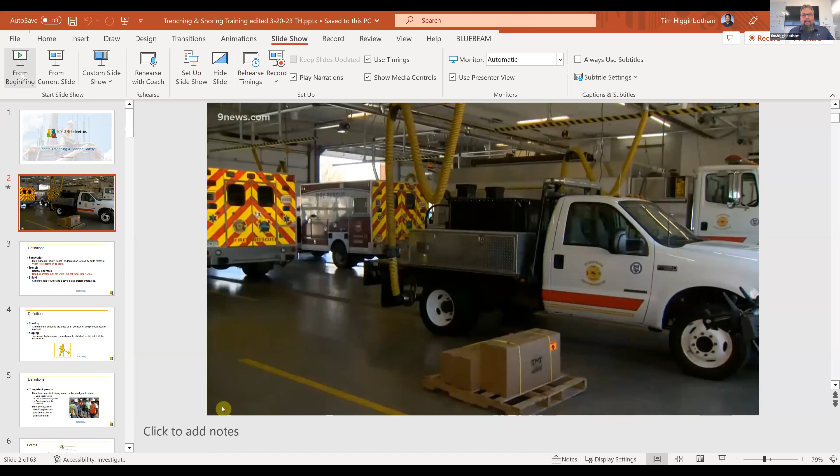Yep, sure can. Awesome. So I'm doing this right. All right, good job, Tim. Yeah, thanks — I'm going to tell you, I took a college education just to get this piece of it.

Well, good morning, guys. Again, I'm Tim Higginbotham. This is Encore Trenching and Shoring safety we put together for you guys. So we appreciate you guys letting us be a part of it.

Why are not my slides moving? What's going on here? This is real quick, guys — I'm going to start out with a video.

Remember when we were talking about that trench over in Windsor? I wanted to start out with this — this was a news article from 9 News that came about, and it's a pretty heartwarming video. I kind of want to talk about that and why this video came into play. This is a once-in-a-career type incident.

The call that cleared the garage on Tuesday — it was empty, yeah — sent everyone, including Chief Kris Kazian, was a long day, to a home construction site on Camberley Drive.

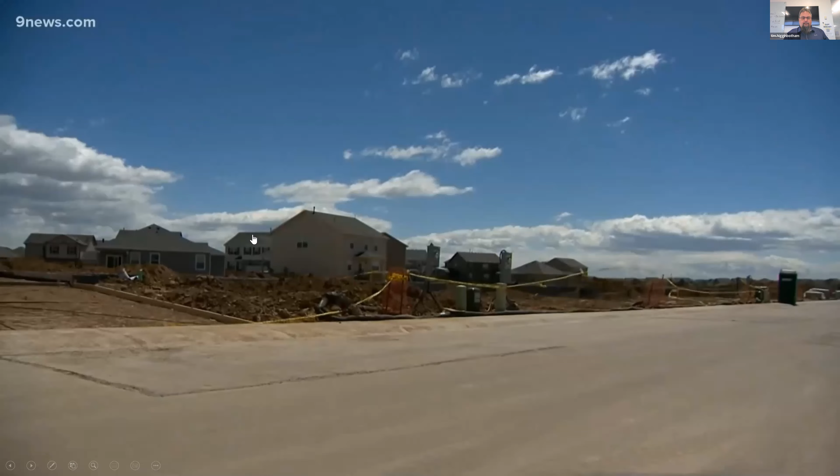All that dirt is all dirt that caved in. Two workers in a trench were buried in about 8 tons of dirt. Very heavy, very compacted when it all collapsed.

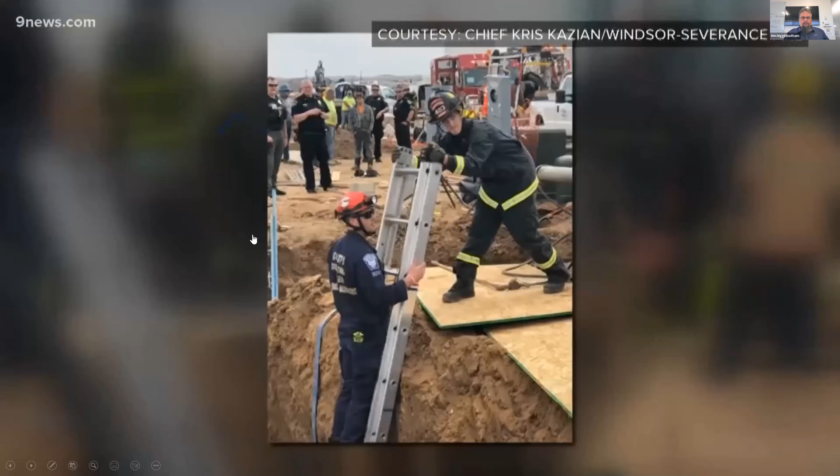Fire crews don't think anything was used to shore up the trench walls. On arrival, we did not see a trench box in place. They used heavy equipment and eventually shovels to dig. Every time we got a bucket or two of dirt out, more dirt would fall in on them.

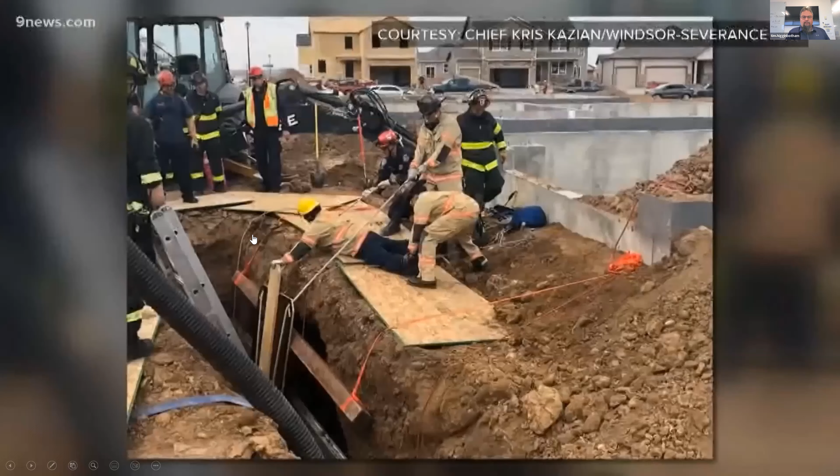They knew at least one worker was still alive. For whatever reason, in this case, he was able to breathe for hours, able to talk too, first through a PVC pipe and then through a microphone to family gathered at the scene. Our crews felt that it was important for this family and for him to have an opportunity to speak - a chance to say goodbye.

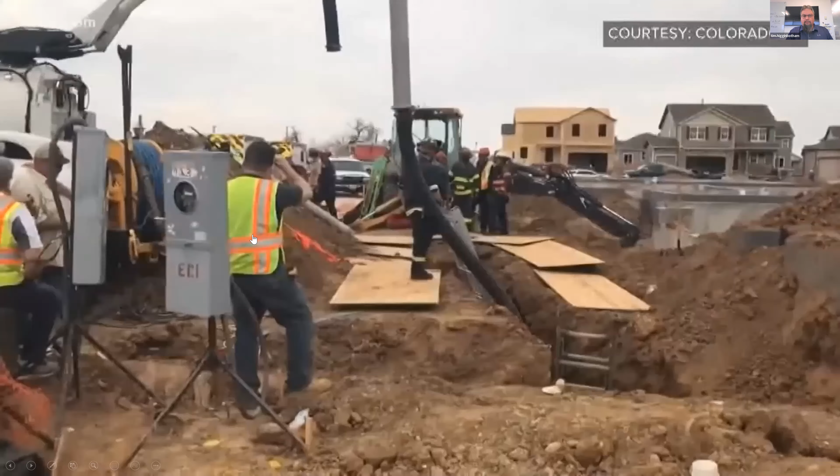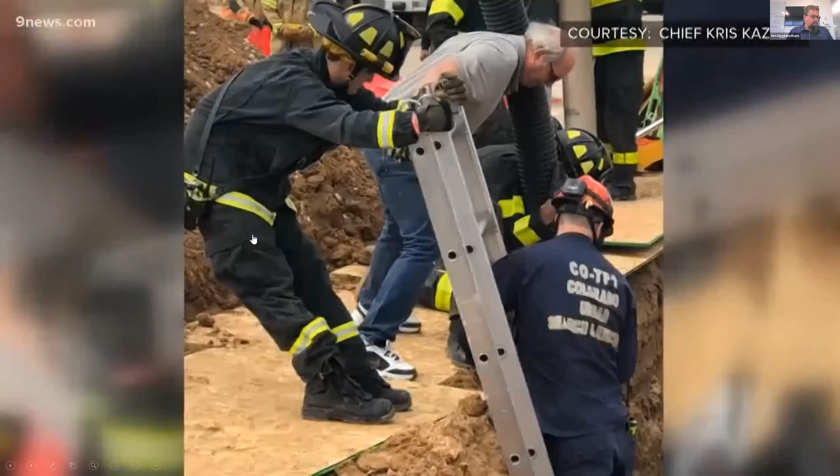As responders, we were concerned that we might have a poor outcome, but we wanted to make sure that he and they got a chance to communicate. It'd be nearly 12 hours before crews pulled the men's bodies from the dirt. So it's very challenging for all of the responders, mentally and physically. The kind of call no chief wants to repeat.

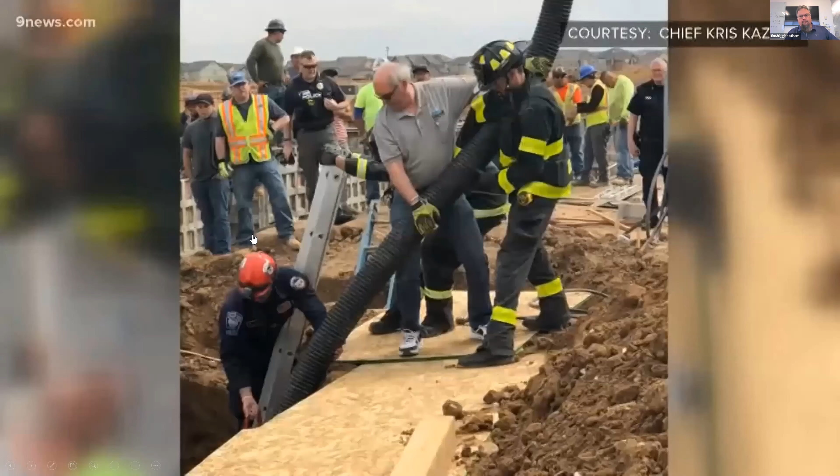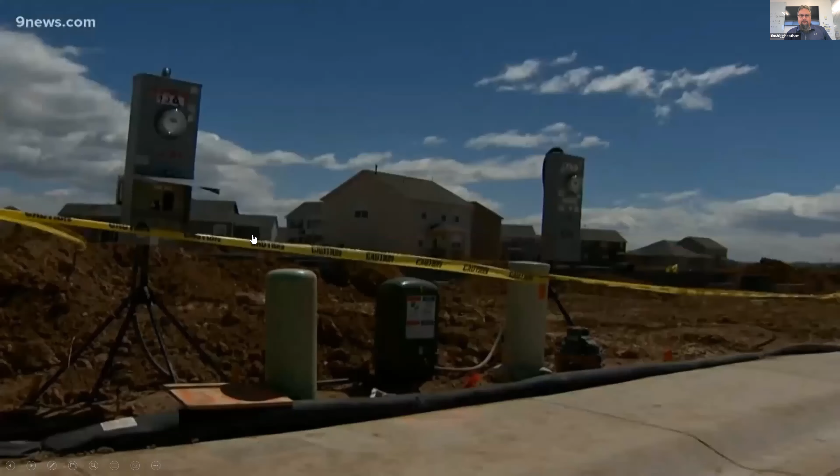Our thoughts are with the families. It's definitely a tough time, and they're not the outcome that we were looking for, and we worked very hard to have a different outcome. In Windsor, Noel Brennan, 9 News.

Yeah, like I said, that's a real video. That happened here, guys. I'm sorry, but I still get the chills when that guy says, to say goodbye. It almost brings me to tears, to be flat out honest with you, because I couldn't imagine talking through a pipe or talking through a microphone, can't see them, all you're doing is just saying goodbye and I love you. So when it comes to that, guys, first thing we're going to start off with here is understanding what an excavation is, what a trench is, because it's important to understand.

I mean, we've seen it on the job sites, we got to dig them out, we got to get basements in. A trench is a narrow excavation, so its depth is greater than its width, which can't exceed more than 15 feet.

A shield is like a structure that can withstand a cave-in to protect people inside that trench. And shoring is more of a structure that supports the side. So when you're talking about a shield, that's something that we use probably more than anything - that's the trench box that you guys are going to dump into the trench.

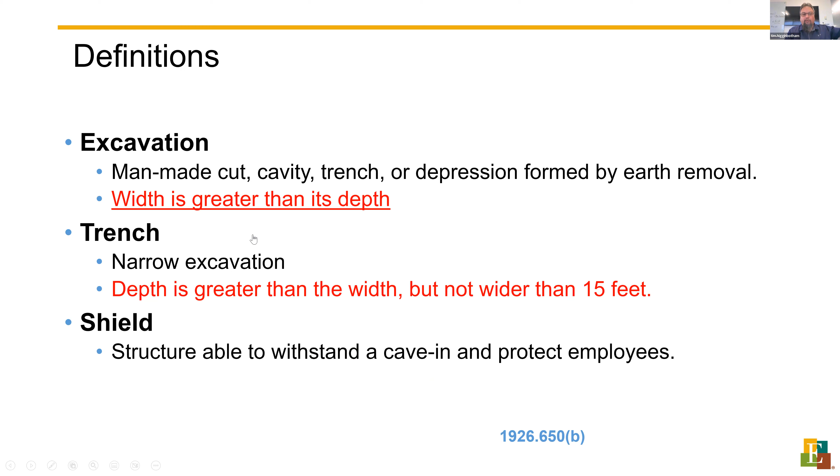That's what we're really going to talk about today. We're really not going to talk about shoring a whole lot, because now you're dealing with timber structures, aluminum shoring, things that you got to figure out how to get built and get inside the trench - normally it's built inside the trench. We won't do anything like that. These are things that are going to be up for long periods of time.

Slopings are techniques to give inclines an angle to where they don't cave in, they don't slide. It gives those guys an opportunity to work inside of a trench. And the thing about sloping, guys, when you got let's say a 10-foot wide trench, and then you have to trench - we'll talk about ratios, but like a class C - you got to open that up wide. If you're 10 foot in the middle of the trench, you're going to be 10 foot on each side of that trench. You just now opened up a 30-foot wide trench.

So a lot of times when we talk about sloping, sometimes you just can't do that on a job site. You don't have 30 feet, especially when you go downtown Denver - you're just not going to get 30 feet. I mean, they use all the real estate that they can.

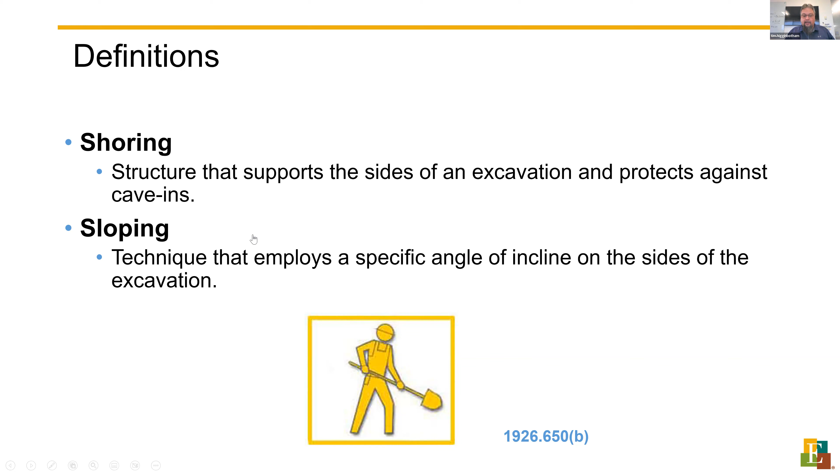Competent person - someone you got to have on site when you're trenching - and training is important. If you don't have a competent person, then you get caught. It could be criminal charges if someone dies inside that trench. I heard that just this morning, and Joe was telling us that those guys got charged - that company got charged, cited for that trench, for those 2 guys dying inside that.

A competent person must have specific training and knowledge about soil classification and the use of protective systems required by the standard, and must be capable of identifying and eliminating hazards inside that trench. When it's raining, snowing, any kind of weather, the dirt can change and you can have different classifications — a class B on top of a class C, or vice versa. You've got to open those up according to each classification. It's really tough when you have a C on the bottom of a B, which is very rare, because everything gets so compacted the deeper it goes.

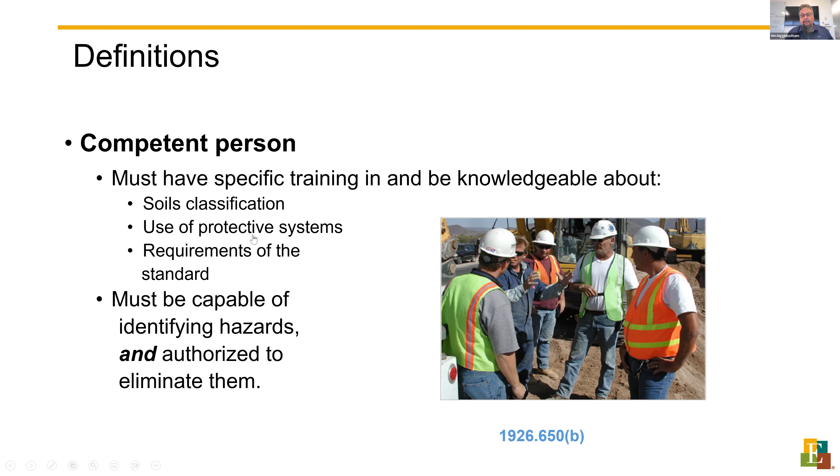This is what we use — we actually use a permitting process. What this does is it gets guys involved. It asks them what they've done, if they've looked at it, how they've looked at it, what soil classification, how they got that classification, and that they've called 811 and gotten their locates, including our subcontractors. This also includes that if we have a subcontractor on site, they have to get their own ticket number for 811 — they can't piggyback on ours.

Every 30 days, it shows on number 3 a 30-day 811 ticket number, so it automatically reminds them they have to do this every 30 days. Be flat out honest with you guys, that's what this permit process is for — to get these guys to think. When they come up with their soil types, it shows what it is — type C, 1.5 to 1; 1 to 1 for type B; 3/4 to 1 for type A. It gives them a good idea, because the guys have already been trained. A lot of times all they need is something to bring back to their memory on what they need to do.

It also gets their project manager involved — it requires the project manager's signature. Anytime you guys can get a permit process going when it comes to trenching, it's great, because it makes them stop for a minute, and that's what we want them to do. Sometimes we go, hey man, let's push, let's get it going, but the best thing I can tell everybody is get these guys to stop and think, make sure they've covered everything, because there's lives at stake, and we're all held accountable for them, especially the competent person on site. Be honest with you, him and the company are held liable for that. So this is our permitting process.

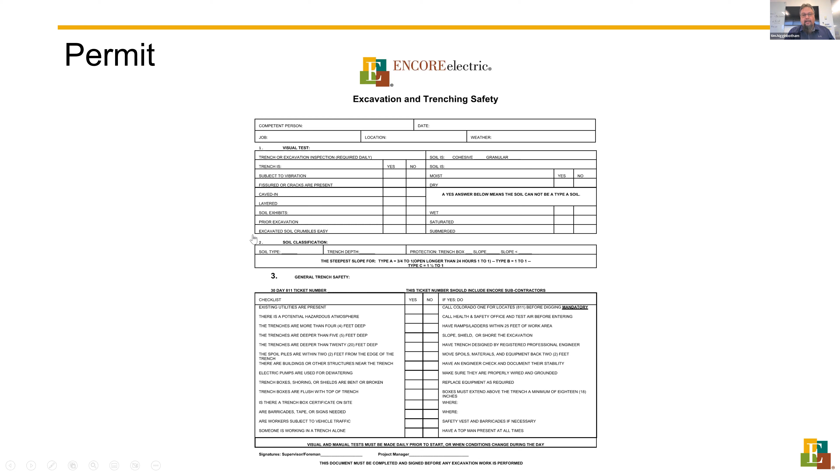When it comes to the weight of soil, 1 cubic foot of soil weighs 110 to 140 pounds, guys — that's a lot, and that's just 1 foot. Imagine a 1 foot by 1 foot square box — 110 to 140 pounds. Now think of a backhoe bucket, about 3 cubic yards. 1 cubic yard of soil can weigh 2,100 pounds. So now you're looking at a backhoe that can hold 2,000, 4,000, 6,000 pounds of dirt.

One thing you want to do is communicate with those operators before they dump that in. Years ago, about 20 years ago, we lost a gentleman with an electrical contractor — he died inside a 2-foot trench. He told the excavator operator he was done, but then went back to grab some tools and put a pipe back together that he'd forgotten about, and the operator dumped a whole load of dirt on him. Killed him instantly. His wife called and couldn't find him — he didn't come home that day. They dug him up the next day. So really communicate with them — if you're going back inside that trench, you've got to let your operator know, so he doesn't drop any more dirt, because the minute you tell him you're done, he's going to continue to do what he needs to do. Communication is important.

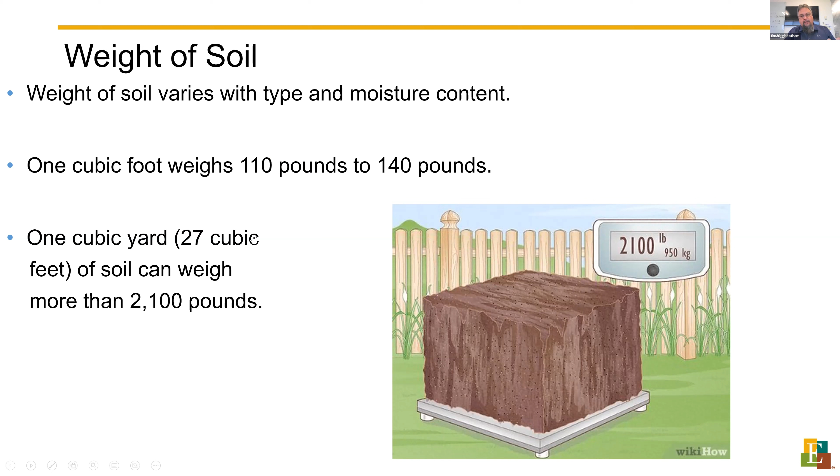When it comes to that weight, when we store all that dirt on the side, I just want everybody to know — let's say we've got an 8-foot, 10-foot deep trench open, and it's 5 foot wide. You put all this dirt on there, and it starts to crack. It starts to make these fissures inside the dirt.

Remember, you put 6,000 pounds of dirt there, and there's a cavity. There's so much weight on that dirt it can cause it to collapse inside your trench. So you want to push that spoil pile back at a minimum of 2 feet. If you're going to have big piles like that, I'd recommend putting them somewhere else and then picking them up and dumping them back in the dirt.

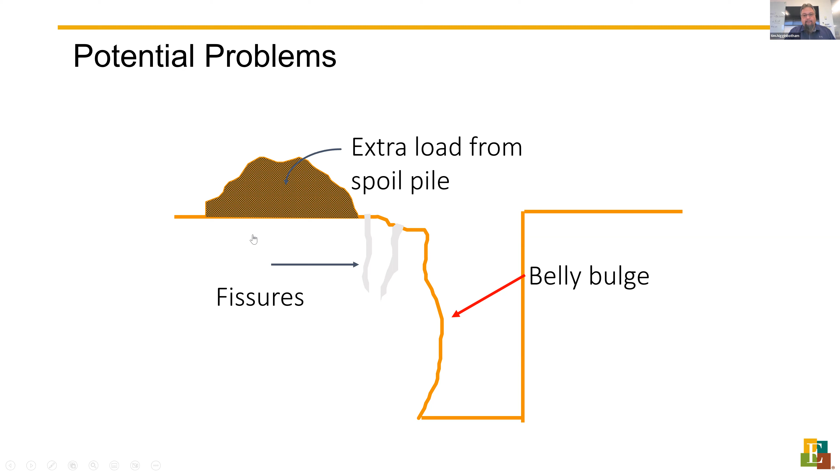Honestly, anytime we can't get inside the trench, we'll dig it, build the pipe on the ground, and kick it literally inside the trench. Anytime we can stay out of it, we will. The only time we really get inside of it is when we're building duct banks.

But cave-ins, when you look at this, are your greatest risk. Other things to think about inside these trenches, if you don't know your dirt, are toxic fumes, if there's any kind of gases in there.

Like Rocky Flats, if we're doing work out there — that used to be some kind of chemical storage facility with our military. Now they're building houses on it. But one thing about it, guys, is it's good to test the dirt in those areas so you know what's inside of it.

Machinery near excavations can cause a collapse. Machinery likes to vibrate a lot, so you really want to watch machinery when you're out near excavations, roadways and traffic areas, underground utility lines, and any kind of falls over 6 foot.

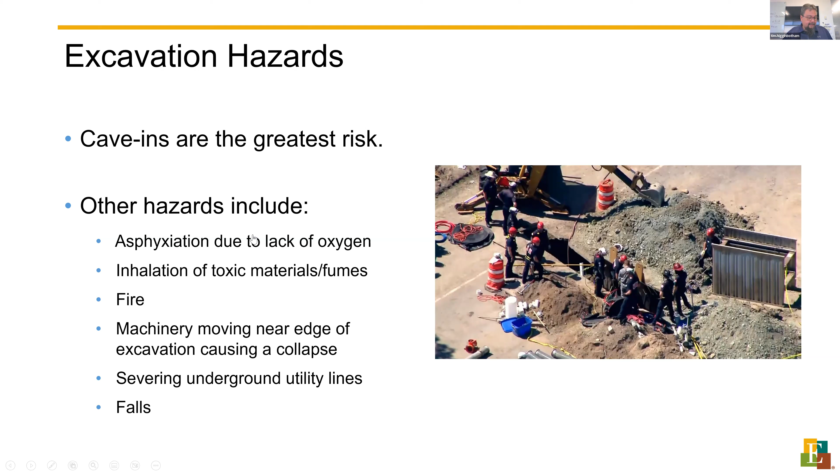Let's talk about those utility lines. They seem to be happening quite a bit here lately — you guys watch the news or hear things about it. Utility lines are important, you must call 811. What they do is look for your sewer, telephone, gas lines, electric lines, water lines, and these are the colors they go with: red is electric, yellow is gas, and blue is water.

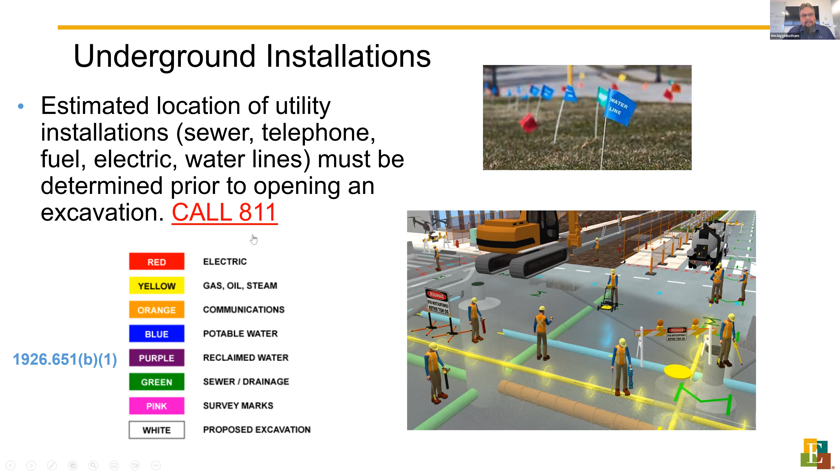When you dig these lines, you can't dig on top of them, because if you break them you can get charged that cost to fix them. It's expensive — if you break them too many times, Xcel Energy will actually fine you in the tens of thousands of dollars because you keep hitting their lines. I've seen that happen. So it's required by the standard, call 811. This is why we like to put it on the permit process, because it gives us that number too.

When you're looking at those numbers, this is what it looks like. They put it in a straight line, and you hand dig or pothole over those lines, minimum of 3 feet on each side. If you're using a trencher, you cannot trench within 3 feet of that line. I've seen those lines off time and time again, and they can be at least 3 to 5 feet off, so I'd recommend hand digging every 5 feet.

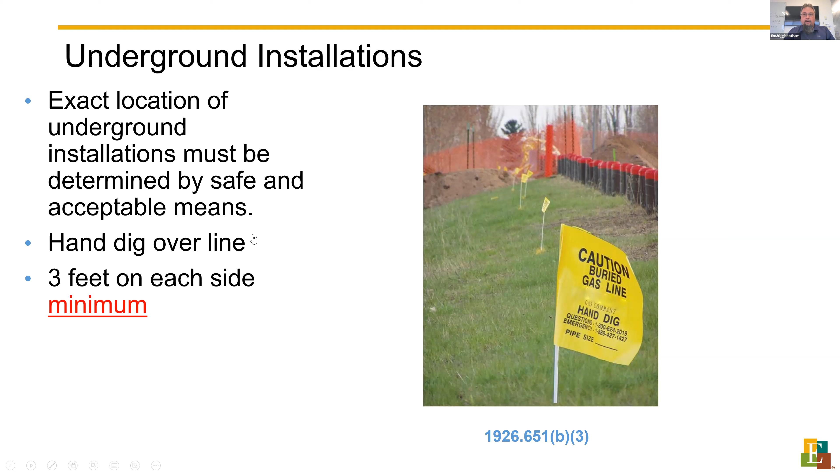You're going to have 10 foot of trench there, and you're going to have to hand dig or pothole. But believe me, guys, it's better than hitting an electrical line, especially a 13,200 volt line — it can create quite an arc blast if it doesn't kill you.

Stairways and ramps, egress inside these trenches, are important, especially if they're deeper than 4 foot in depth. 4 foot's your number, so you have to have a box or something inside that trench at 4 foot. Technically it's 5, but our program is 4 — I'm going to go with 4 for us today, because here's the thing: 5 foot is so close, guys.

5 foot's so close, guys. And when OSHA comes out and puts his tape measure inside that trench — Jack King can probably say yes to this — he's going to find the deepest piece of that trench, and if you're 5'1", 5'2", you just violated that trench. So we put a 4 foot in place. Lateral distance of travel can't be more than 25 feet.

So you got to have a ladder in there, ready for access and egress. Okay, and one is fine. You look at this picture and he's got his trench box there.

There's something wrong here. When you look at that trench box, he needs to be at least 18 inches above that ground, with the ladder there. That way things can't fall inside that trench box. It's almost like a guard to protect material from going inside of it. So remember, trench box, 18 inches above the ground.

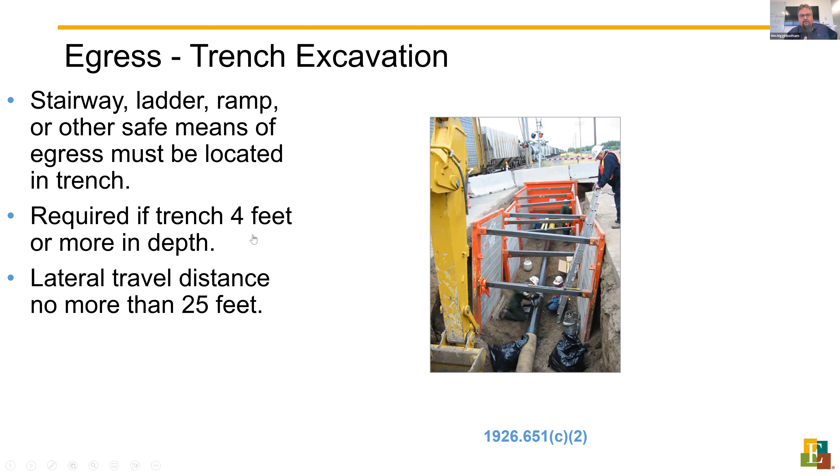25 feet of lateral distance when it comes to egress, required if a trench is 4 foot in depth or more. Here's your travel.

Let's say you dug a 50-foot trench, and this is a great way to do it, guys, because you can literally see how he's got 2 ladders on each side. See how that guy's right there in the center? You could drop a ladder right there in the center of that 50-foot trench, and have ladder access 25 foot of lateral distance either way you go. If the trench is larger than 50 feet, now you got to have one every 25 feet.

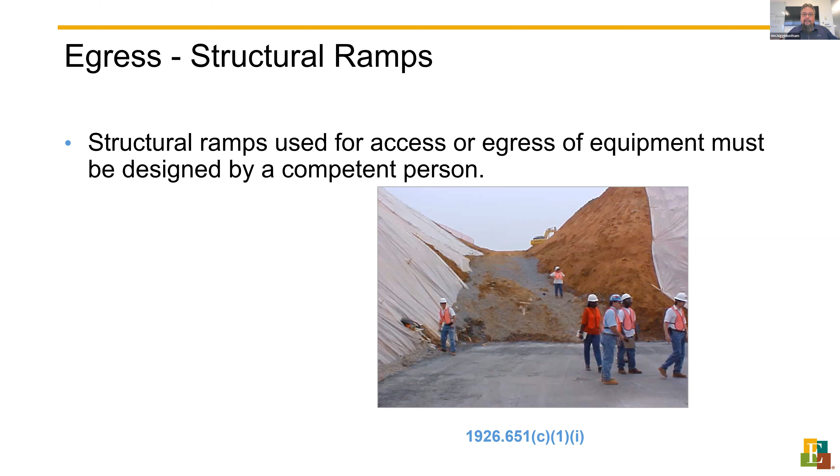Now, you can't do this for a trench on one side of the trench. Let's talk about that trench for a minute. I'm going to go back up here. See on this right here, let's say he's got a 50-foot trench here. And if you have vertical walls on each side of that trench, you have to protect that vertical wall.

I tell my guys, if all you're going to do is have a 5-foot trench, slope each side of the trench. Now you don't have that vertical wall, and you have access and egress in and out of the trench. You can use that for 25 feet inside. Then you can put your ladders in if you have a longer than a 50-foot trench.

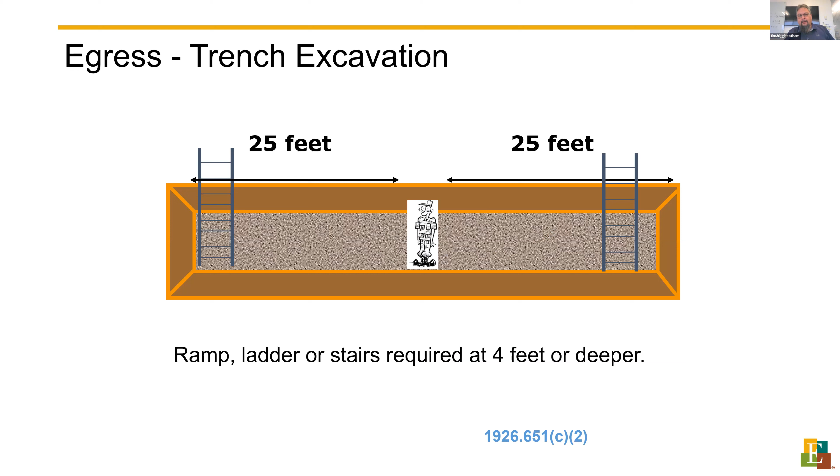So don't forget about those sides. It tends to be forgotten about a lot.

Another thing is exposure to vehicular traffic. We do a lot of work on the roadways, a lot of trenching on the sides of the roads. So you got to have some kind of barriers up, either guiding traffic or you got some kind of Jersey barrier to protect you from vehicular traffic. You also have to have a trench box because all the vibration from the traffic can cause these trenches to collapse. So never get into a trench. Honestly, even a 3-foot trench can collapse on you when you're on your knees.

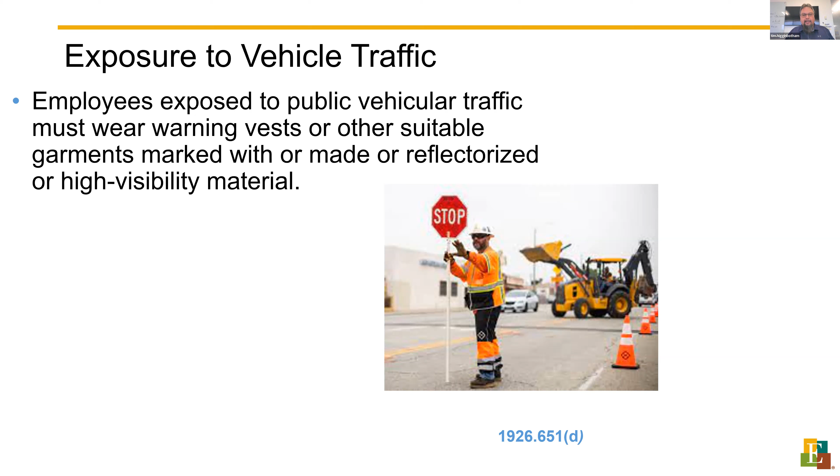So really watch your vehicular traffic. Sometimes when you're exposed to so much vibration, you might need to get a trench box in, even if you are under 4 foot, or at the 4 foot. So really watch what kind of area, know what your dangers are, know what you're exposed to, and then it takes a competent person to do that. He can make those corrective actions as needed.

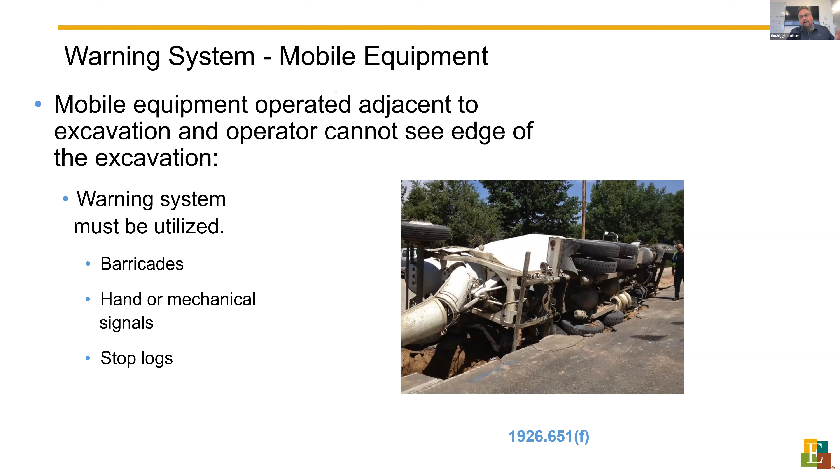Mobile equipment, watch where they're going, barricade them. That way it keeps stuff like this from happening. Concrete trucks from going inside. We've actually had no one inside a trench, but a concrete truck actually caved in one of our trenches because he was so heavy. Honestly, it was just a way where they needed to route these guys somewhere else, and they did. Don't know why, but that's another story.

Another thing is gases. Know the environment that you guys are dealing with. If you have to test the environment, test it. If you see something coming out - but normally if you're on a job site, the whole job site gets excavated, so you're automatically talking about Class C.

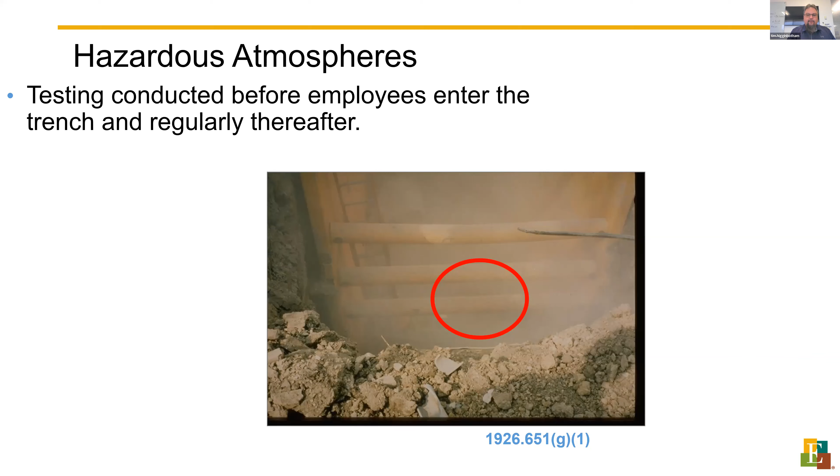We'll talk about Class C classifications here in a minute. But if you have gas inside the trench, those are things you've got to test for to make sure that you're clean and safe. Test 4 feet if suspected. These are your LELs, oxygen, carbon monoxide, H2S - that's a 4-gas meter, the only 4 we test for. Test at the bottom of the trench and at the middle of the trench, just to make sure we don't have anything accumulated.

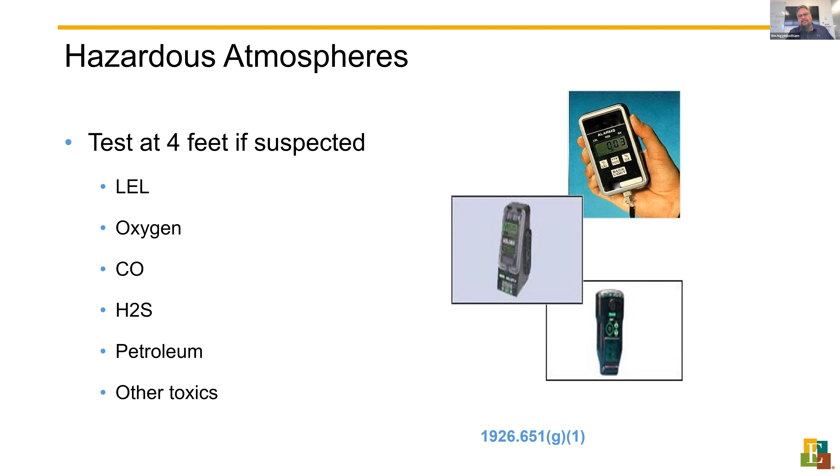If you have something heavier than air inside that trench, it will actually sit at the base. These are your oxygen levels, 19.5 up to 23.5. You'll see about 20.9 here in Colorado almost faithfully, unless you go up to the mountains. Right here on the Front Range it's about 19 to 20. Combustible gas concentration is 20%. Your lower flammable limits and your PELs.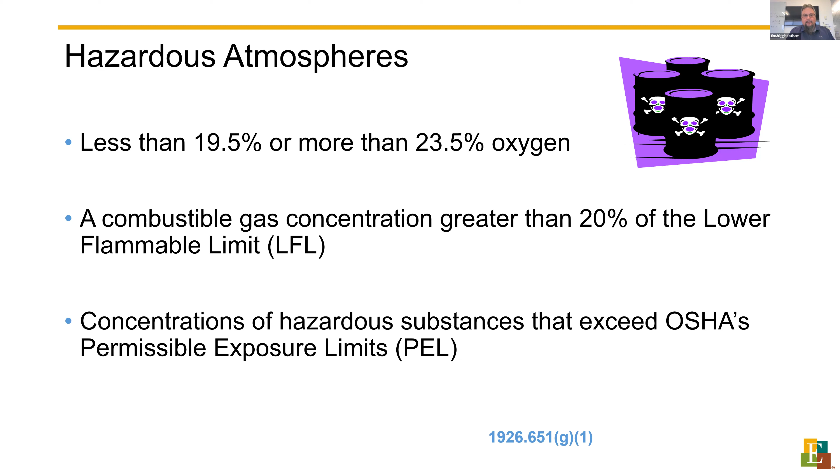Precautions - something else to think about is water. When it's raining, when it's snowing, conditions change. Don't just throw people in the trench - look at it, there's water in there. You've got to get all that pumped out and let it dry. Then you've got to relook at your trench to make sure those walls are still capable of withstanding the pressures and forces, and keep them from caving in. Up to 4 feet, and obviously anything over 4 foot needs to be protected. So watch for the water.

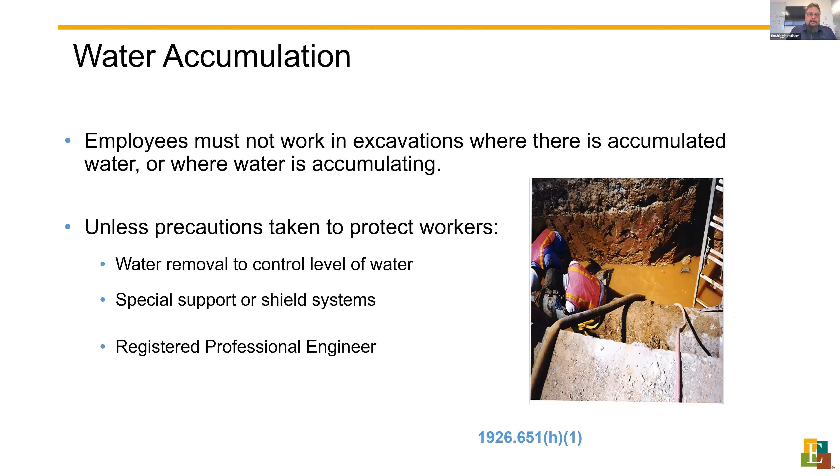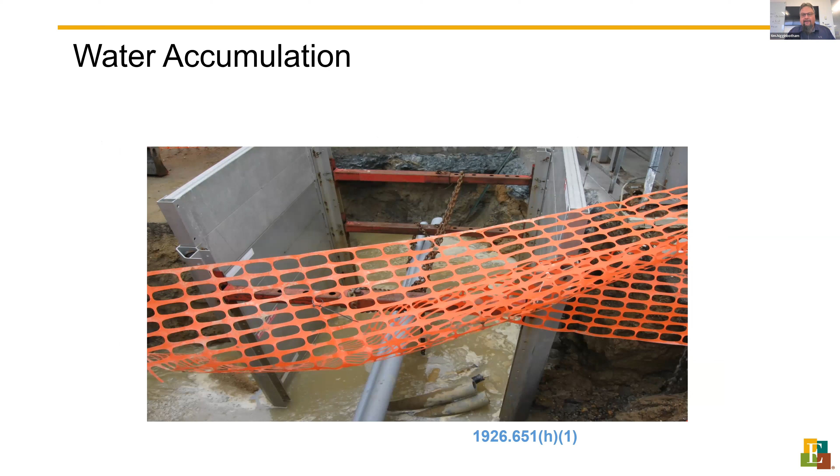You might have to get a registered professional engineer to come check that out. If you have consistent water running inside that trench, you've got to find a way to control the water. And if you're controlling the water inside that trench, the competent person's got to be there to monitor that whole time. If something goes wrong, he needs to be able to get people out of the trench, and if something breaks down, figure out how to get that process back up and running. But here in this picture, you'll see the water pump pumping, and guys are actually inside that trench - they've controlled it.

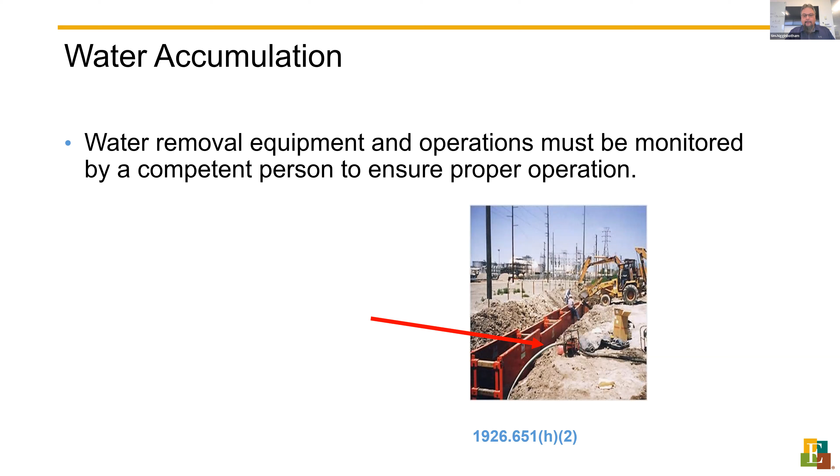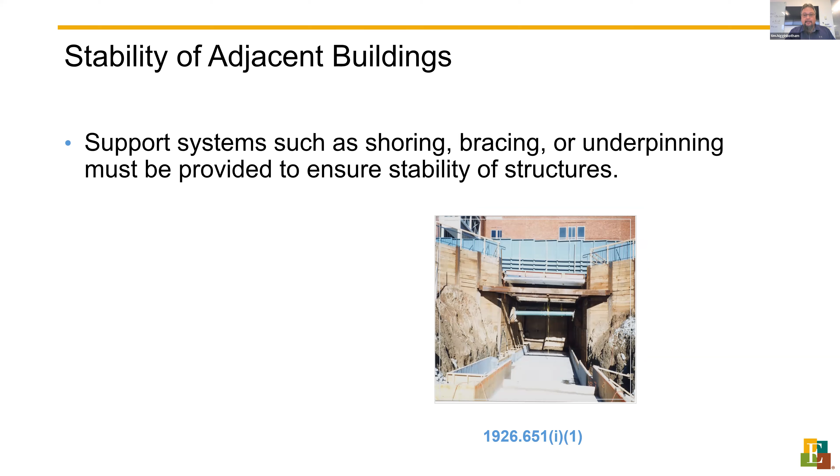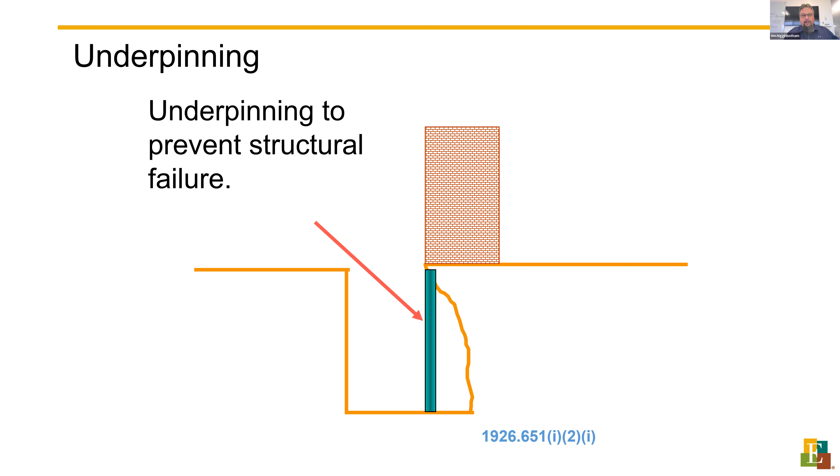Another one too is underpinning, bracing any kind of bridges. If you guys are undermining a building, you've got to pin them and make sure the structure is supported. It may take a registered professional engineer to approve. So when you're digging underneath a building or a bridge, you've got to protect the structure from fall. It depends on how big the structure is, but put something underneath there, even a sidewalk. How many times do you guys need to get underneath the sidewalk, right? If you dig a lot of that out, that concrete's going to break and fall right on top of it. This is a sidewalk.

Employees must be protected from equipment or material that could fall into those excavations. Material and equipment must be kept 2 feet from the edge at a minimum - that's your tools, your dirt, everything needs 2 foot from that edge. You see these backhoe operators straddling this trench - you can't straddle a trench and dig. He's already putting a lot of weight on that dirt. So if you straddle that trench, you could actually fall inside it. Don't be inside the trench when he's digging - he could hit you, or that trench could cave in.

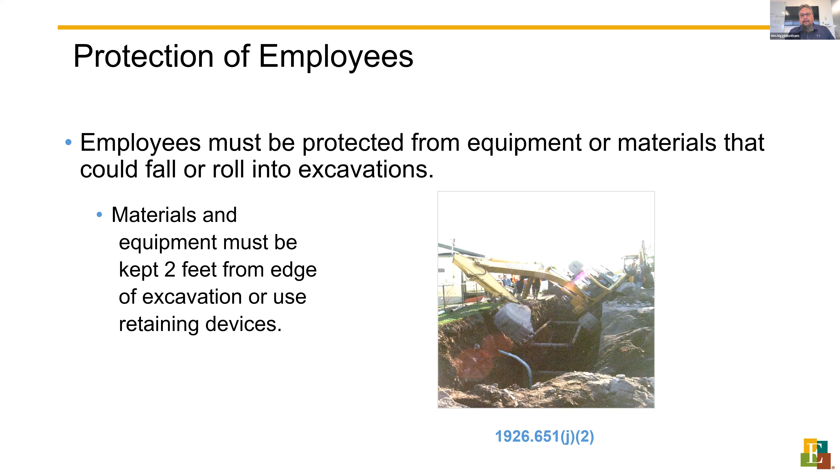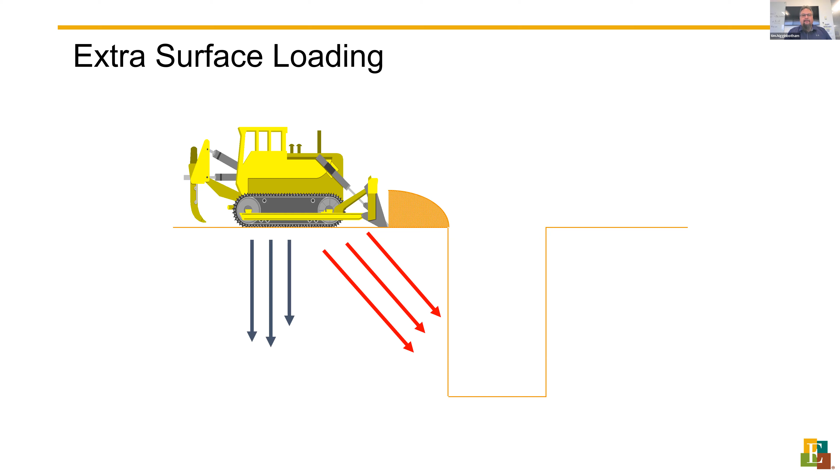Spoil piles must be at least 2 foot from the edge, including pipe materials. And really watch the surface load you're putting on there - when they put it back on there, again, it's weight on the trench. It could fall and cave in on you. Excavation must be protected from cave-ins by protective means.

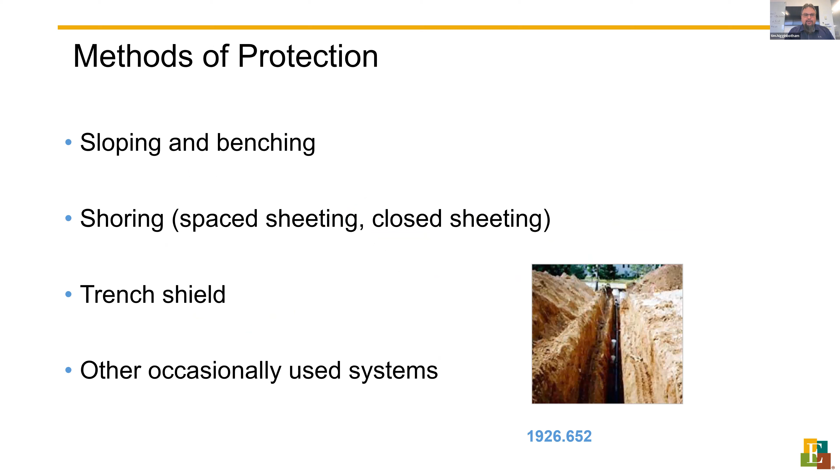Here we're going to talk about a lot of the structures when it comes to trenching and shoring. But here's a protective system - they need to be installed where they can prevent failure and be capable of preventing failure. These things are pretty heavy, they're aluminum. If you buy the aluminum panels, they're nice because you can build them - they come in like 3 foot sections. You can order those panels and build this thing outside the trench, and it comes with a nice little hook on top so you can drop them right in. You cannot build a shielding inside the trench.

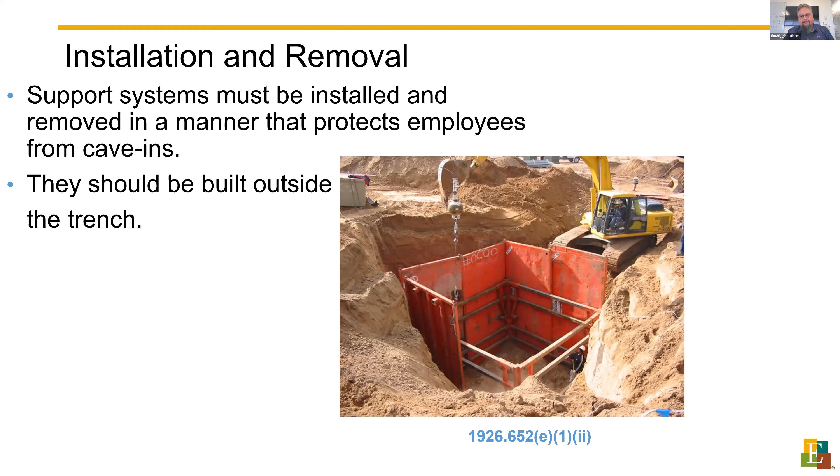Now, if you build a support, what I'm trying to say, if you're trying to remove it, you pull it out. See how he's got this right on top of the shoring? But this right here is designed to be built inside - it's more of a shoring than a shielding. These are for bigger trenches. When they get that big, you just can't take a backhoe and drop it in. But honestly, this is probably the most common piece you guys will use every single day - built outside of your trench and dropped inside.

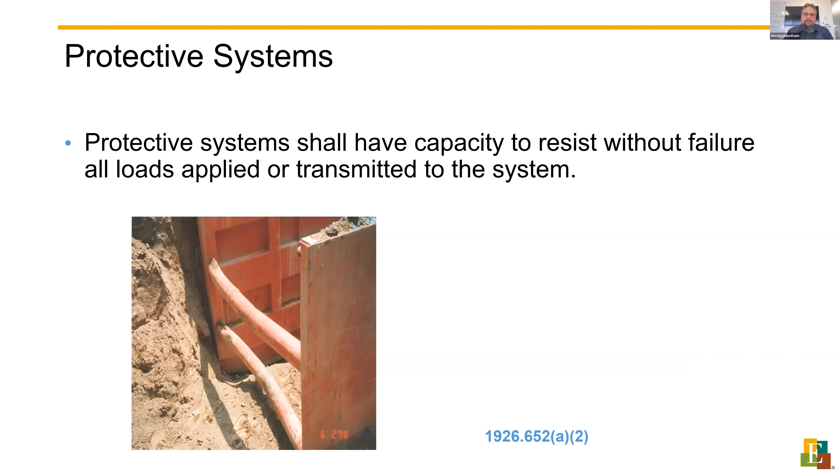Pretty interesting story. But the piece I'm trying to get to is when you're looking at that trench box, you cannot have any more than 2 feet. You can order what I call legs, adjustable legs for your trench box, for your shielding box, and you can have 2 feet there. You just got to order the legs for them - they attach right to the trench box and they're adjustable.

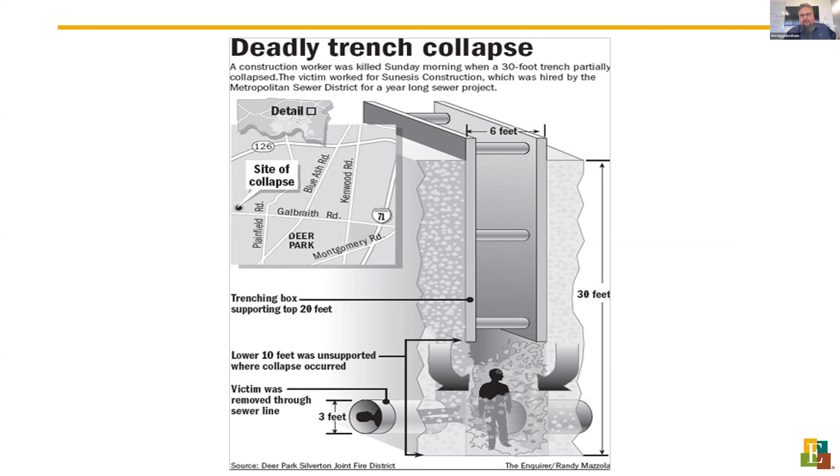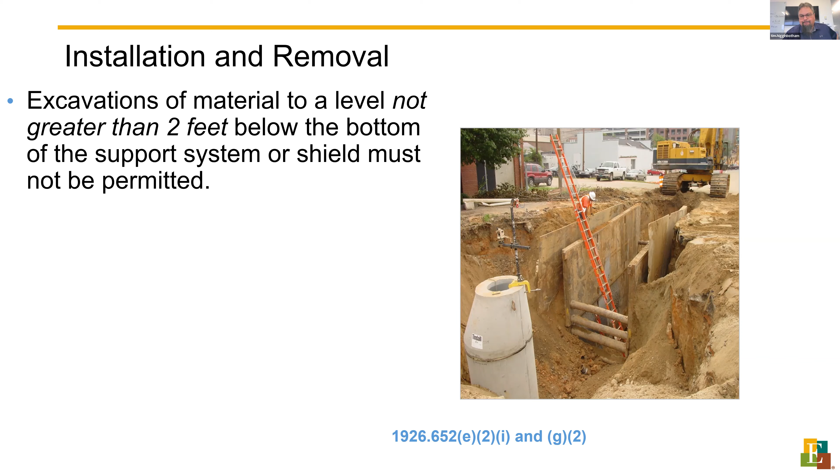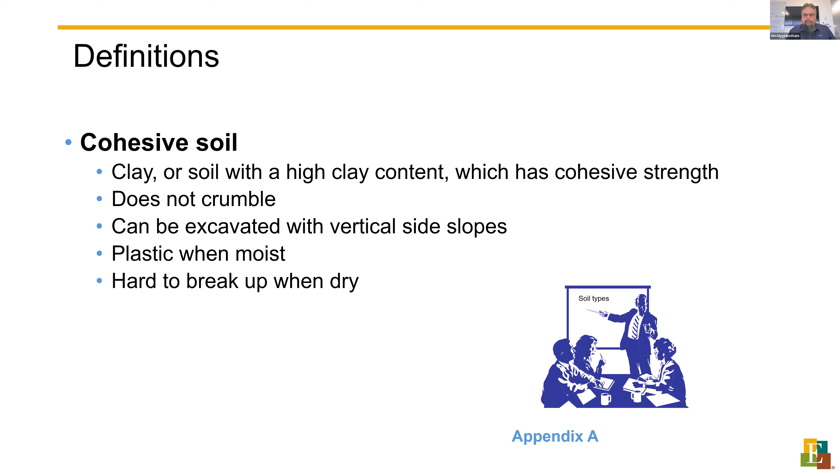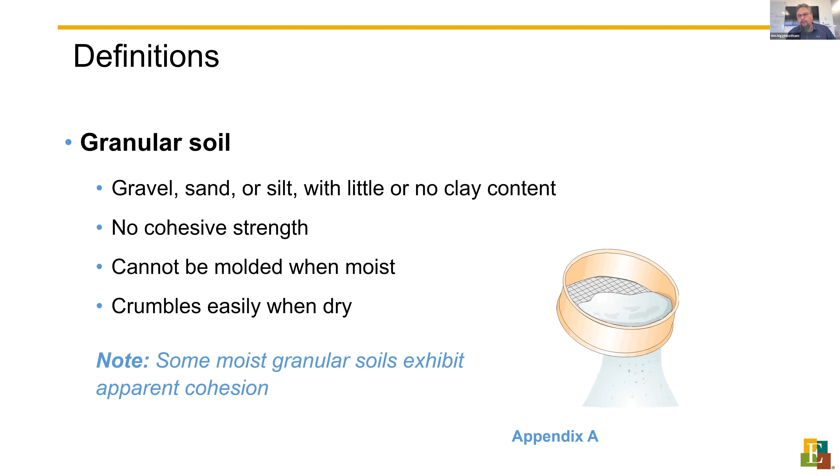A little bit about soil - we're going to talk about soil types. This is kind of driving the end of this presentation. Cohesive soil - let's talk about what that is. Clay, or soil with high clay content, has high cohesive strength, doesn't crumble, can be excavated with vertical side slopes, and is plastic when moist, hard to break up when dry. Granular is like sand, sandy gravel type stuff - it breaks up, can't stick together. Even when it's wet, it still continues to break up. It's probably the worst kind of soil we can have, and there's a lot of it here in Colorado.

What I tell people is the best way to do it - have your operator take a scoop out of the bucket instantly, it can't sit there and dry. You want to take it out of the bottom side of the trench and grab a ball of it. Grab quite a bit, make yourself a nice ball and smash it together, then take some and try to roll it in your hand. That's called the thread test. If you can roll that into your hand at least 2 inches in length and it doesn't break, now you have some cohesive soil.

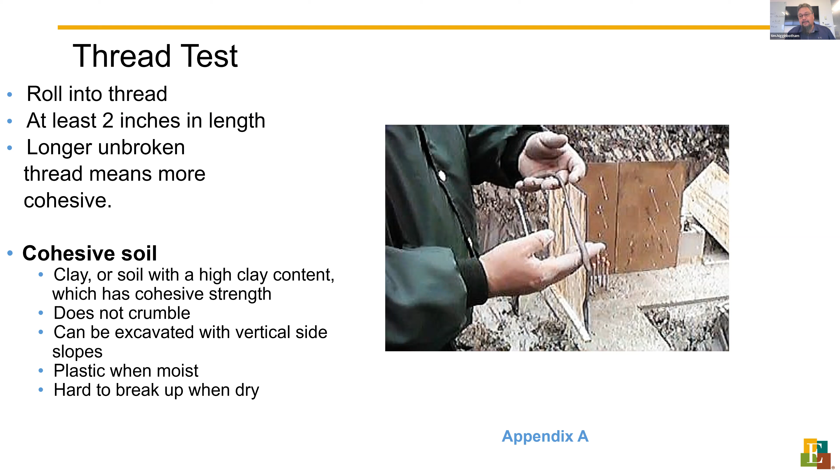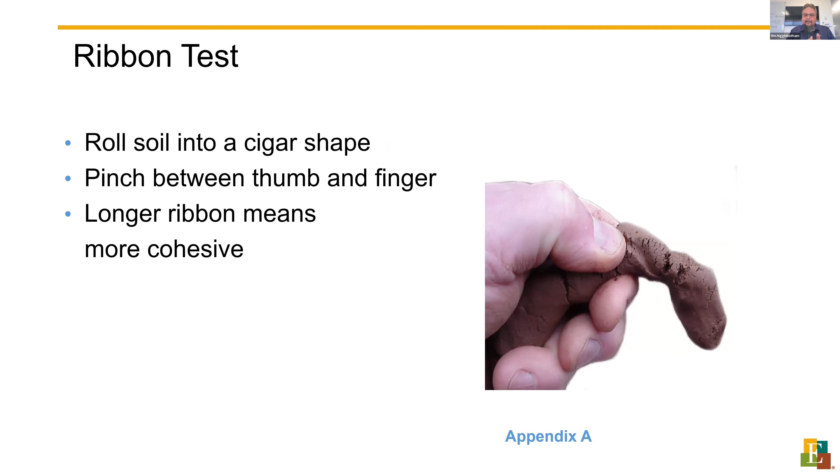We'll talk about soil types - that would be a Class B, and you can bench that. Then you have the ribbon test - I like to get this into a ball, more like a ribbon, then push your finger into it. Don't push in the tip of your finger - see how he's pushing it in, seeing how dense the dirt is. I tell guys, if you can push that in and get to the top of your fingernail, that's some good dirt.

If you can push that all the way through that whole ribbon of dirt and your whole thumb goes in there, then you're dealing with some sandy soil. And this is from the bottom of your trench, guys, don't take this from the top. It's got to be done instantly the minute he takes it, because the minute the soil starts to dry, it can change its cohesive strength.

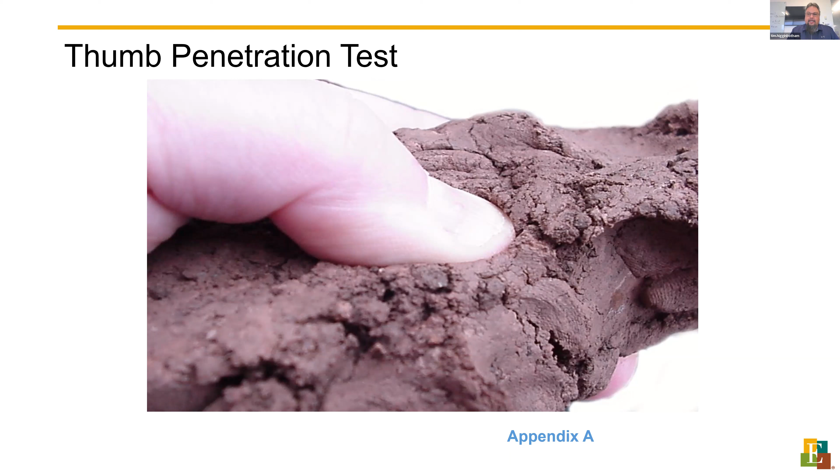This is also a pocket penetrometer. This is another way to test it. If you got one, they're a little pricey, not too bad, but if you're doing a lot of trenching it's good to have one of these on hand, because now you can see your cohesive strength with a tool, a calibrated tool.

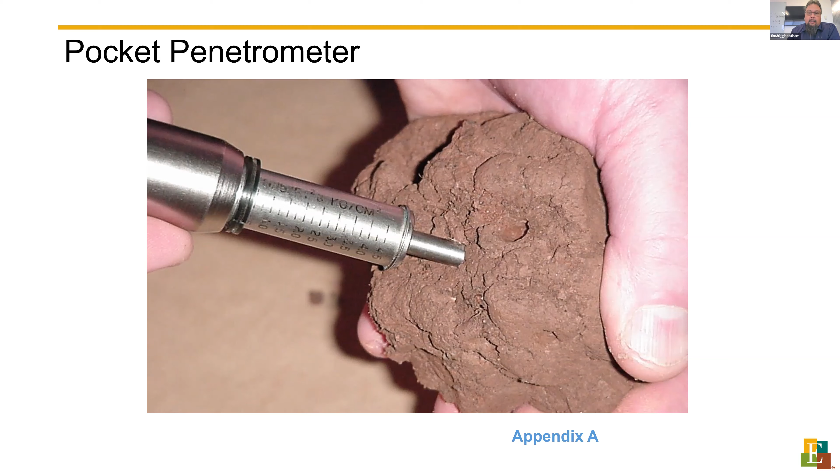So here are these definitions a little bit for type A soil. We talked about the strength of them. Now type A soil is more of a clay, silty clay, a hard pan. It is a really hard dirt, and you can take that 3/4 to 1 when it comes to trenching.

One thing I'm not going to talk about is stable rock. Stable rock, you can have vertical sides. Really, it's pretty rare you're going to find that here. Even going up in the mountains, you're not going to find stable rock, you're just going to find a whole bunch of boulders up there. I'm really not going to discuss stable rock, okay?

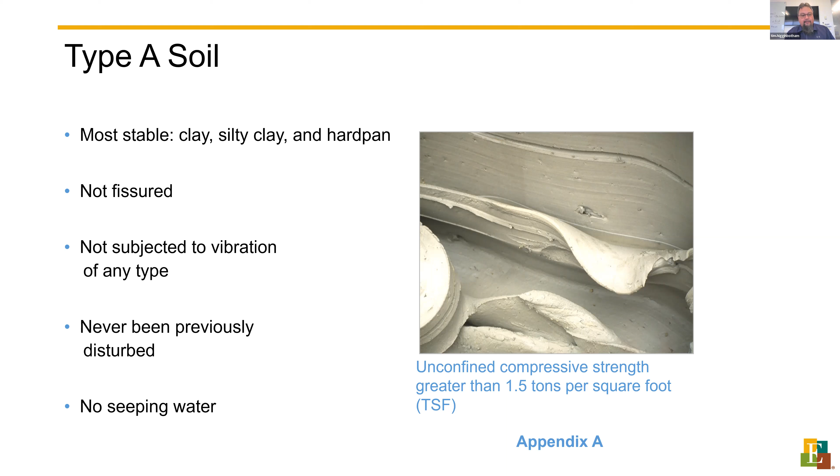But type A soil, though, is good soil. It's not fissured, it's not subject to vibration of any type, and never been previously disturbed. It's some pretty hard stuff, okay?

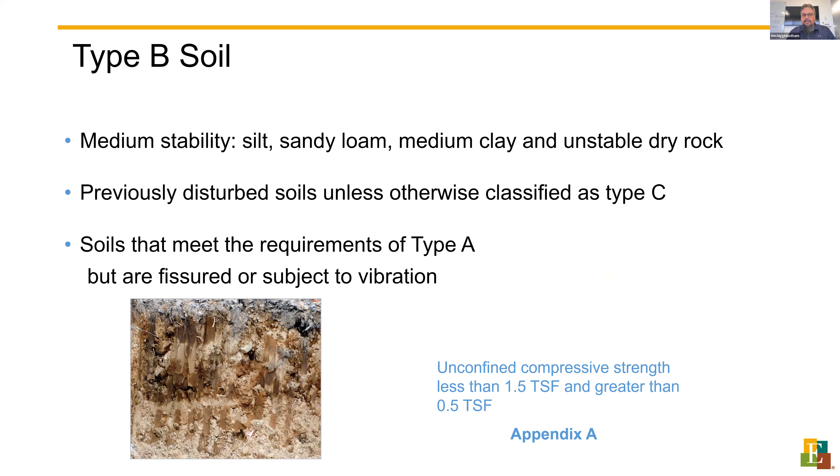Type B soil is kind of that sandy loam, medium clay. We'll talk about benching, but you can bench this stuff, okay? And then when we go to type C, it's kind of a gravel, sandy stuff. It doesn't like it when you ribbon test it, it falls all apart. When you stick your thumb into it, your thumb goes all the way into it.

This is probably the worst soil you can get here in Colorado. It's Class C, and honestly, most job sites are Class C. Very rare you see a job site that's Class B. Number one, general contractors got to test soil and say, hey, I know this is all Class C. A lot of times they'll just go worst case scenario and call it Class C.

Now, if the whole job site's been excavated, they have to call it Class C unless they have a guy come in there and test the entire site, which is not going to happen. So once the job site gets all excavated and dirt gets pulled back on it, which happens 9 times out of 10, it's Class C.

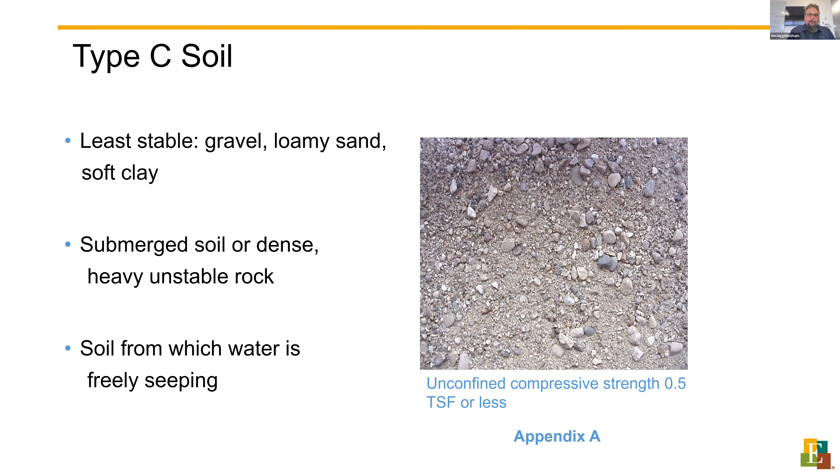Here's your vertical depths, or your slope angles, when it comes to stable soil types. Stable rock, you can have a vertical height at a 90-degree slope angle. Type A, now remember that's pretty hard stuff, you're looking at 3/4 to 1, which is roughly about a 53-degree angle.

Your type B is a 1 to 1. The cool thing about type B is you can bench it, we'll go through that here in a minute, but it's at a 45-degree slope angle. Even if you bench it, it's got to be at that angle.

So when you're looking at a 1 to 1, let's talk about that for a minute. You got a 10-foot wide trench, right? And then you're going to open that up 1 to 1, which means you're going to have 10 foot on either side of that trench, and there is your 30-foot trench. That's for a type B soil.

Type C is 1.5 to 1 at a 34-degree angle. So now on each side, on a 10-foot trench, you're going to have 15 feet on each side.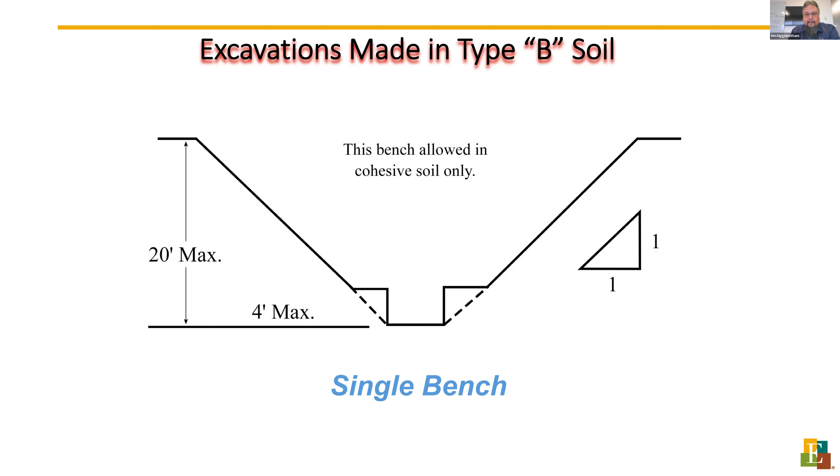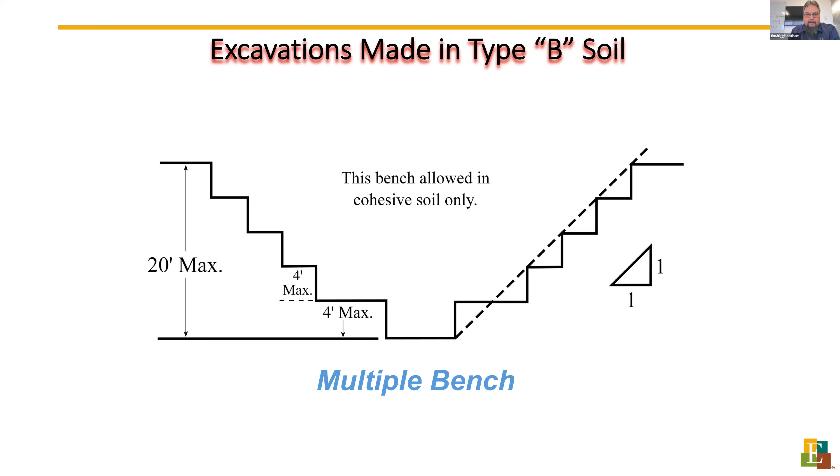Okay, Type B, so here's your multiple bench, pretty popular. 4 foot max, you cannot go 5 feet here, only in Type A after that, but this is your 4 foot max. Again, I tell our guys 2 foot is a good number to stick with.

Here is your simple slope, Class C. This is your biggest slope, your 1.5 to 1. This is a pretty big slope, pretty big trench on a job site, and we do have it quite a bit when there's a lot of work being held in them because they're open for a long time. They're open for months, and if they're open for a long period of time, you got to have some kind of barricades around them to keep unauthorized people out of it.

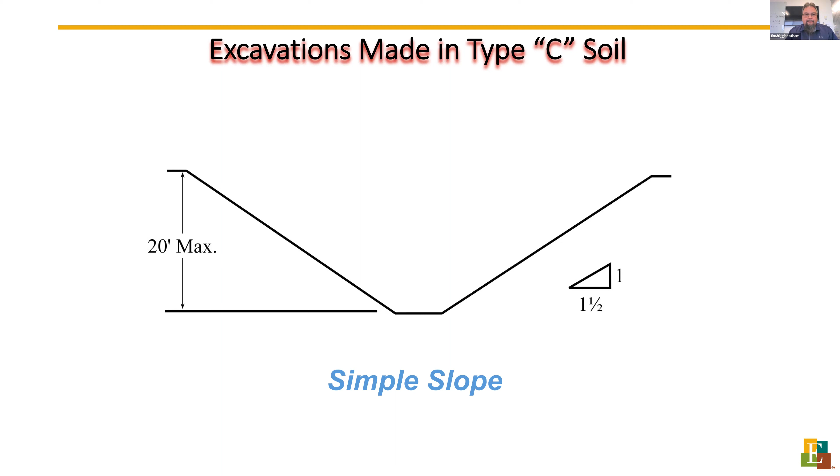And it can't be main egress going inside of the building, going through the trenches. Okay, you cannot bench Class C soil, guys. So let's understand Class C here. You can only slope it, you can't bench it, you can't single bench it. This is what you got from the toe up. What I mean from the toe up is from the bottom of that trench up. It's got to be sloped.

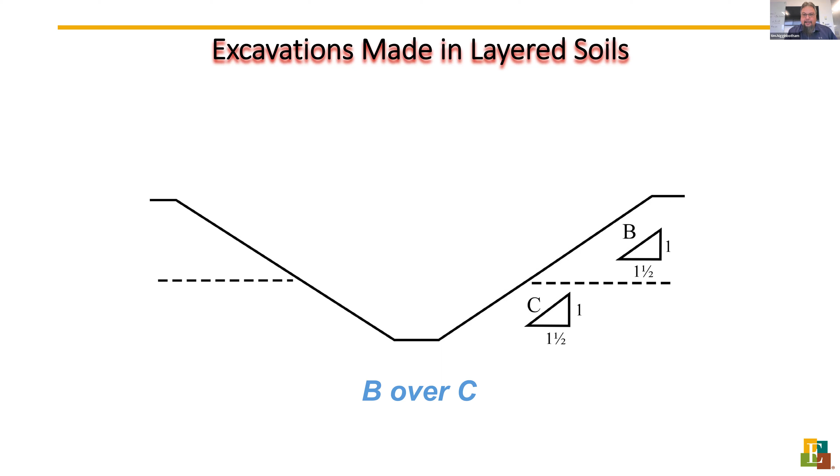Am I making some sense here, guys? You guys learning anything anyway?

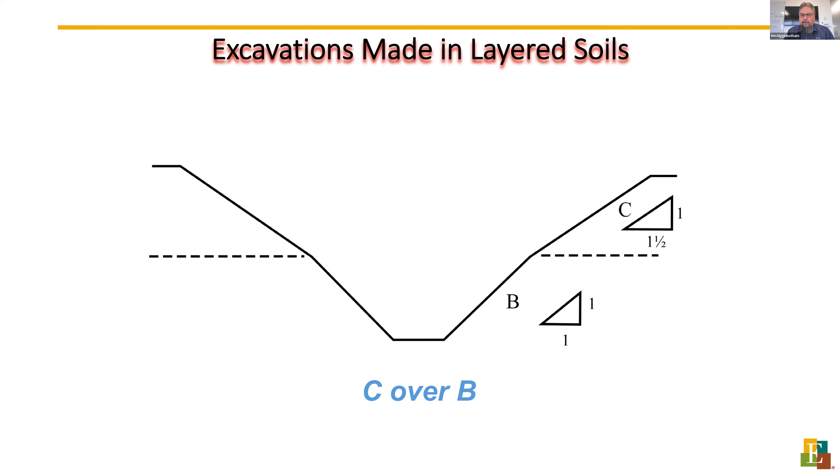Yeah, one more, we got another one here. This is C over B. Again, this is a softer soil on top and a harder soil on bottom. So again, B is 1-to-1, C is 1.5-to-1. You can open those trenches up accordingly. Here's a little bit of benching and sloping spoil piles. We've already kind of talked about all this a little bit, okay.

But always remember, guys, it's important that you know you can't bench Class C soil.

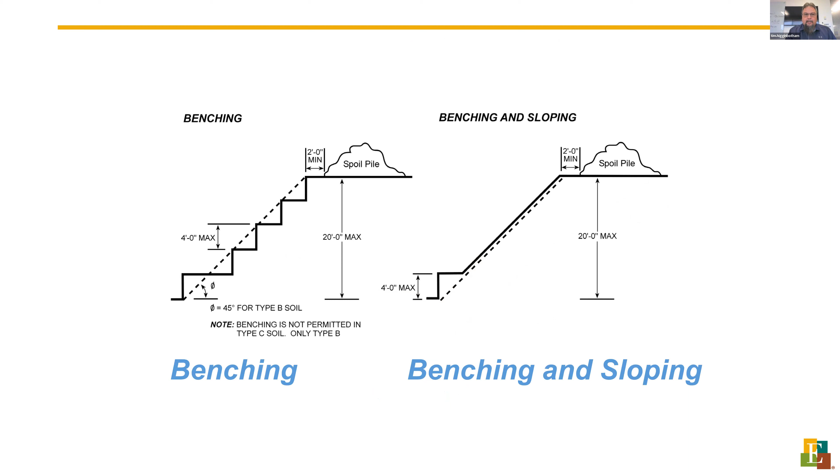Well, guys, that's really all I got for the presentation. I cut this down a little bit, I hope I didn't miss anything, kind of hit on the key points. Let's open this up for discussion. I think I'm right on time, I hope. What you guys got? You guys got any questions, or can I answer anything for you?

Any questions? Thanks, Tim, great presentation, great overview. We really appreciate it. Anybody want to have, anybody have any questions or anything to add to Tim's overview?

Don't make it this easy on a Wednesday.